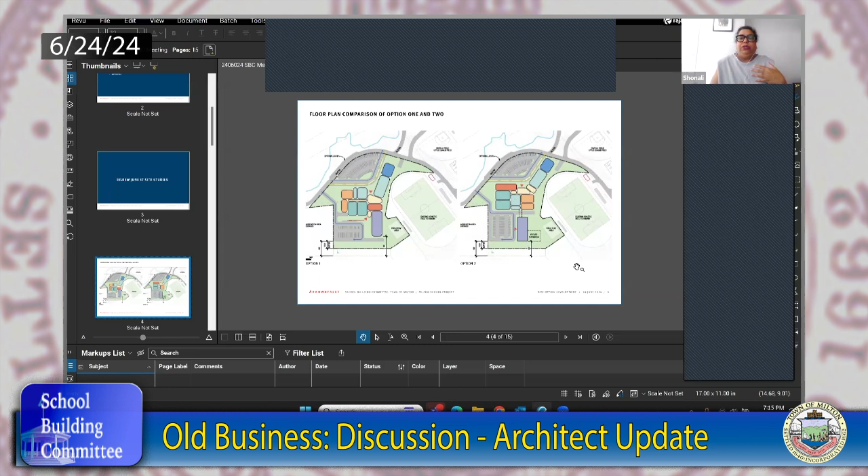Two weeks ago, we presented four options for the site studies, and based on that presentation, option 1 and option 2 were deemed the most interesting and viable for you to pursue. So we took those site studies and started to lay them out more specifically in terms of adjacencies and entry points, really starting to dive into how it fits on the site. There was some feedback from the June 10th meeting that we incorporated about parking, as you can see on the right-hand side, which is option 2. There was a preference for the parking on option 1, which we then integrated into option 2.

So I'll start by going back and describing the two options. Option 1 is the one-building option where the preschool takes over the first and second floor of this academic wing, with its own separate entry to the south. The middle school has its entry coming off of the drop-off to the north. The admin area is sort of the knuckle between those two entry points, so they can oversee both entries as different students are entering and exiting the building. The academic core is on this north wing, and also on the 3rd and 4th floors of this southern academic wing, where the common spaces—the cafeteria, the gym, and the library—are all flanked over in this larger core.

We did also revise the fire access lane, so we were able to cut that back and gain some more space over here and over here. That's a high-level summary of option 1. I have more drawings coming up that will show the full massing.

Option 2 is where the preschool is separated. We pulled that south a little bit, as everyone can remember. Here we've indicated some sort of cross covering so that people who need to go from the preschool to the middle school will be covered and protected from the weather. It's a similar idea to option 1, where we have a 4-story academic core over here to the north. As you'll see in the 3D and exploded axon, the remaining academic core actually flanks the common space, but the entry sequences are fairly similar in both options, and it lays out on the north side pretty similarly in both.

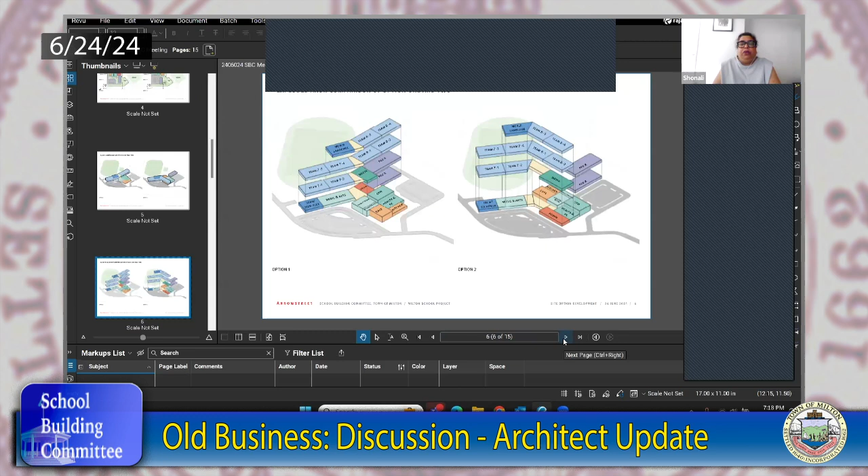We can go into these exploded axons. Anybody, please feel free to interrupt - I know I'm going pretty quickly.

So we put some of the exploratories on the 1st floor, the 2 7th grade teams on the 2nd, and then on the 3rd, the remaining 2 7th grade teams. Over here on the south side, we have the 2 pre-Ks and then the 8th grade teams on the 3rd and 4th floor, with world languages on the 4th floor. The central core is going to have a stair and elevator that will go through the admin media area and have a shared common space.

Carrie, I just have a quick question about the location of the gym and auditorium.

Sure - I know this is just very preliminary, but I'm curious if it would be able to be set up on the Gile Street or Gile Road side of any of these, to put the traffic for these types of spaces, where it's going to be engaged more often, away from areas that have been areas of concern. I'm just curious if that's a thought, or if... So you're suggesting these common public spaces move to the north? Yeah, exactly - just use the school as a buffer for those types of activities. I know from the use of Pierce right now that the gym is used a lot, and the auditorium, I think, would be engaged a lot as well. It's just a thought I had as I was looking at this over the past couple of days.

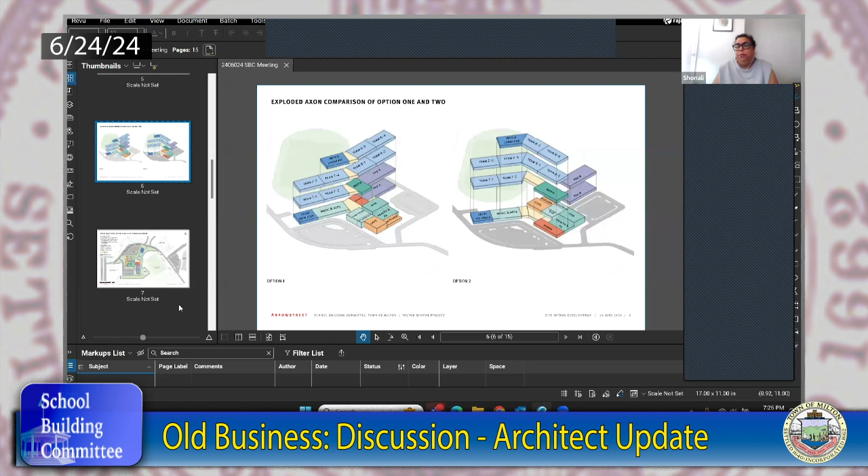I can keep going and show larger plans. I don't know if this was enough of a recap for everybody, but I can just keep going.

So these are the larger scale plans that you saw from the first slide, but with the spaces labeled. You can see we have STEM, tech, flex classroom over here, music and arts. We tried to get it as close to the auditorium so that they could have some sort of relationship, cafe, kitchen, the health and physical education spaces that support the gym. And then again, I had mentioned that shared admin space because in this version, the pre-K is embedded in the building.

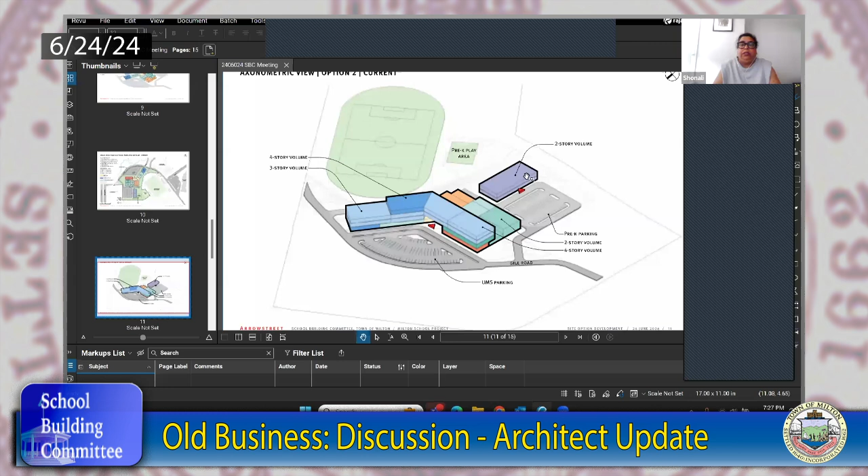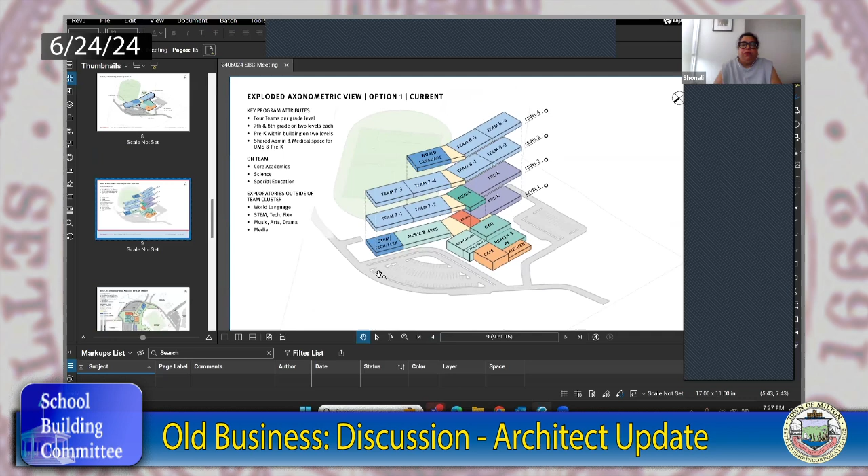If I go back to the one building option, I think we've reviewed the stacking pretty clearly. Again, there's a vertical circulation in here that connects to some of the core areas, the media, the admin, and some of the shared spaces.

With the 2 building option, similar layout, but I think in this option, we have the auditorium embedded in the center because it doesn't really need any windows, and then the gym off to the side. So Carrie, to your point, the gym could either have a separate entrance off of the road, or we could relocate it a little further north so that it has more connected access to the main entry. Those are some options we can explore as we get further.

What's nice in both options, the kitchen is on the exterior wall, so there'll be easy access for loading and unloading for deliveries. And again, for the auditorium as well, if there are large scale props or anything that needs to enter, you can easily access from the south side.

I'll also add that a couple things that were discussed on this option that people liked was that the ability for future expansion on the pre-K building, as we sort of dashed in one potential way that could happen, is more easily done in the 2 building approach, and it just makes it a little bit more flexible for how that could play out in the future. And also there was a nice potential adjacency with the cafeteria and some outside space to the east, and also its proximity to the pre-K, so that when there are meals being delivered to the pre-K, they're not traveling very far.

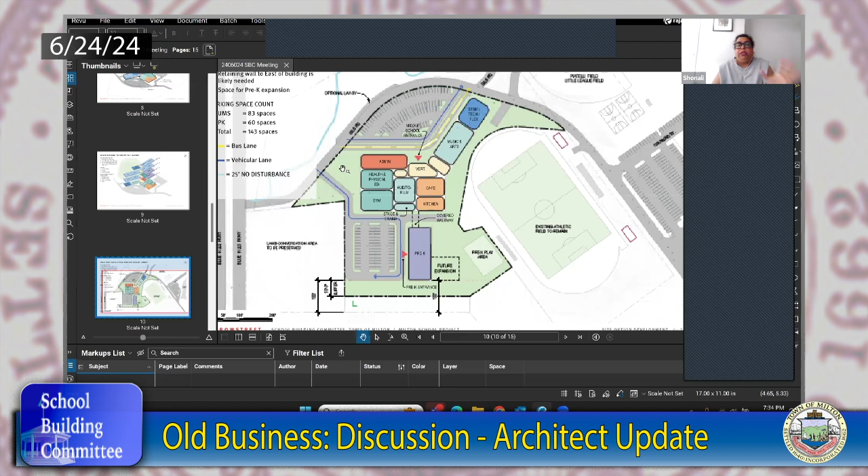We also have the separated pre-K area. As Andrew mentioned earlier, we've been able to squeeze out some space for the middle school behind the cafe—a spillover, possibly an outdoor classroom—and some space over here by the gym, so there could be an ancillary area to support those activities.

Going to the massing, based on feedback from the visioning and workshops, the world languages prefer to be grouped together—any other feedback about those locations, we're happy to take it—but we've put all the world languages as a separate team up on the 4th floor. That gives students the opportunity to intertravel between floors, which we heard teachers wanted to encourage—a bit of independence for students to get to classrooms in other areas outside their teaming areas.

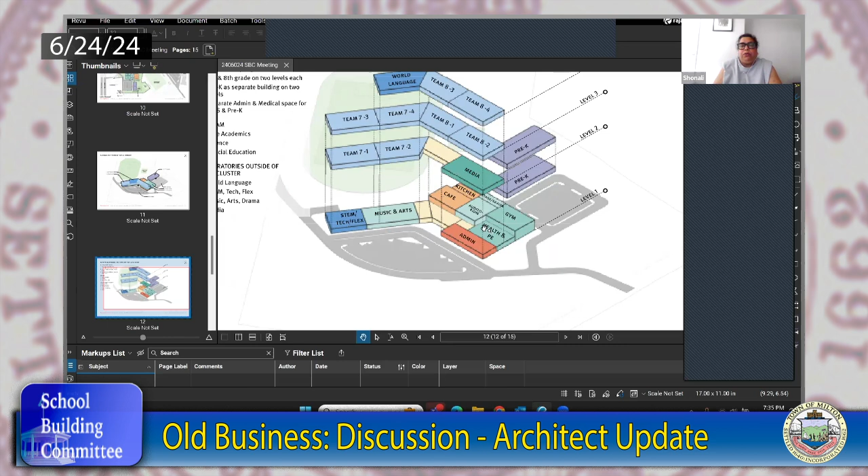So we've flanked it with spaces on the 4th floor and then spaces on the 1st floor—controlled direction, I'd call it. With the media center in the middle on the 2nd floor, over the public area, that can bleed out into the vertical circulation area shown in yellow, which is where a stair and elevator would be located, but it can all open up into an engaged space.

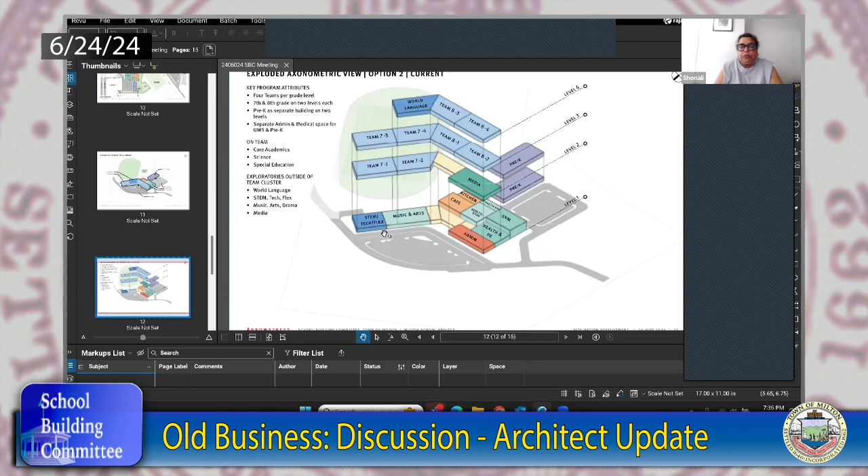I'm not sure there's much more to review. I did bring the site plan so there was additional context for people if they needed it, but that's the summary of where we landed last week. This week we're continuing with the adjacencies, and hoping after we discuss which site option, to move on to next steps.

So essentially, Shonali, what you guys from Arrowstreet are looking for is direction between option 1 and option 2 from our committee, correct? That's correct. So in regard to committee members, we're working on getting to a cost estimate, and this is one of the final pieces—maybe one or two more we're working on. Ideally we were hoping to have a vote last week, and the reason for doing this tonight is to get input from Dr.

Burrows and leaders from the district.

As Dr. Burrows mentioned, option 2 was their preference. So for others, let's do it this way: if you do not feel comfortable making a vote, speak up now, just so we're aware. But if not, basically open it up for a motion for someone to see which option they would like to vote on, and then we can vote it up or down from that.

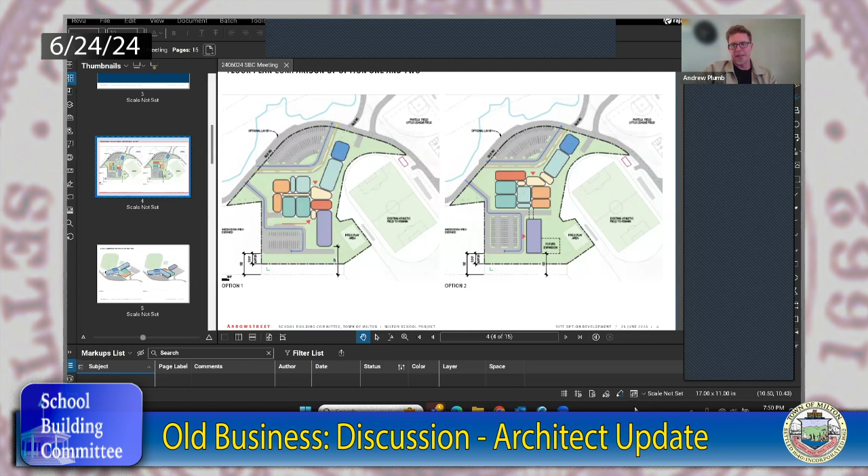Similarly, whether we're looking to simply meet the current energy code that the town of Milton has elected to abide by, or do something beyond that. So absolutely those choices will have an impact on cost. And I think once we've made the decision about option 1 versus 2, that's sort of the next topic. I don't know that that's on the agenda this evening, Sean, but it is something we're going to be looking for feedback on shortly. Yep, let me take my hand down. Sorry. No problem.

So just seeing if there are any other questions or comments. And honestly, very good discussions, so I appreciate them all. And if none, I think Mr. Loring was about to start a motion. Didn't I already make a motion? Yeah, okay, you did, so I think we made it and seconded. I think we were in discussion. Yep, you're right, apologies about that. I got too deep into the discussion.

All right, so seeing no further discussion, we'll go to a roll call vote. So this is the recommendation of option 2. So we'll start with Mr. Cohen.

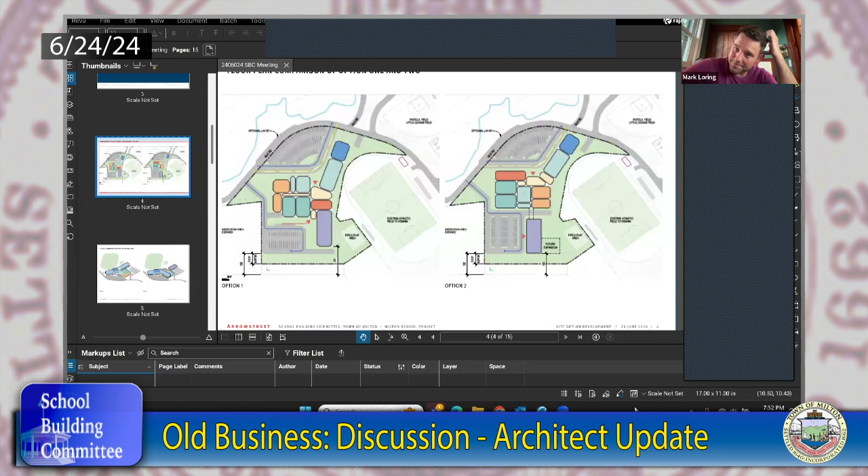Yes. All right, Carrie Hurley. Yes. Scott Tarashek. Yes. Aqua Bond. Yes. Selena Miranda. Yes. Tim Lombard. Yes. Mark Loring. Yes. And Sean O'Rourke. Yes. Unanimous. All right.

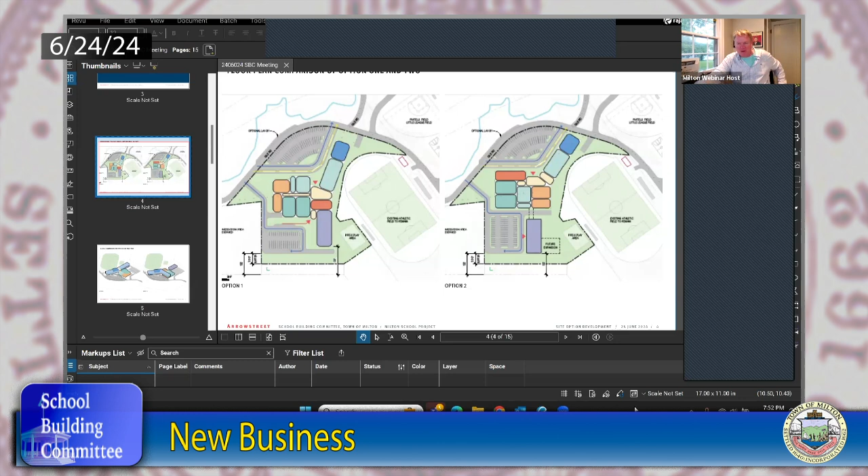Next thing on our agenda is essentially just, Seamus put a topic of just new business. So essentially it seemed pretty open-ended. So I sent around, the town was notified last week from the Executive Office of Energy and Environmental Affairs that they did their review on the proposed legislation, the land swap for ecological value. They came back with a positive recommendation, that came through last Friday. So I sent that around for everybody, I hope everybody got a copy of that. We know from the time Senator Timilty's Chief of Staff came to our meeting that that was one of the things they were waiting on.

So the bill is in committee, scheduled for a 3rd reading. That committee, from what I've seen today, has reported it out as of today. Our hope is it will be read for a 3rd time and voted on through the Senate, and then migrate its way through the House.

I've already got in contact with Representative Fluker Oakley, who's a co-sponsor on the bill, and she's going to do her best to usher it through to try to get us to that deadline before the end of the session. So the practice would be that the bill would come out of the Senate into the House, be read 3 times, then engrossed in both the Senate and the House, and then would go to the governor for signature, and then it'd be finalized.